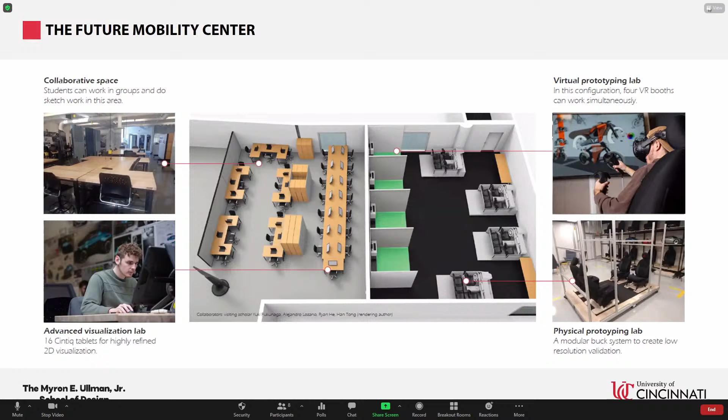From 2016 on, we had the opportunity to relaunch our transportation program and rethink how vehicle design was going to happen in this new world, with all these new megatrends converging at the same time, and this upcoming revolution of mobility and urban spaces. We created the space you're looking at here, where we can do multidisciplinary work and fantastic collaboration with our advanced visualization lab. You can see Enrico here, back from when we were doing the studio.

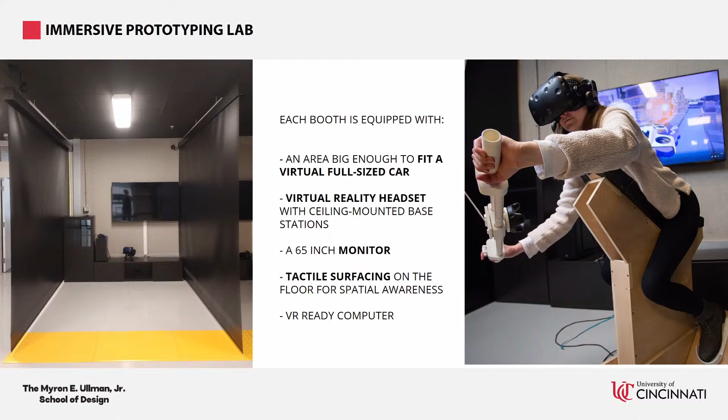On the right, you can see when we adopted emerging technologies such as virtual reality, with which Gravity Sketch has been a fantastic partner in helping us develop that. You can see Tanner here developing his capstone project. It's an interesting space that we think is a vision of the future design spaces. As head of transportation design, it's been a pleasure working with these guys connected into building this vision.

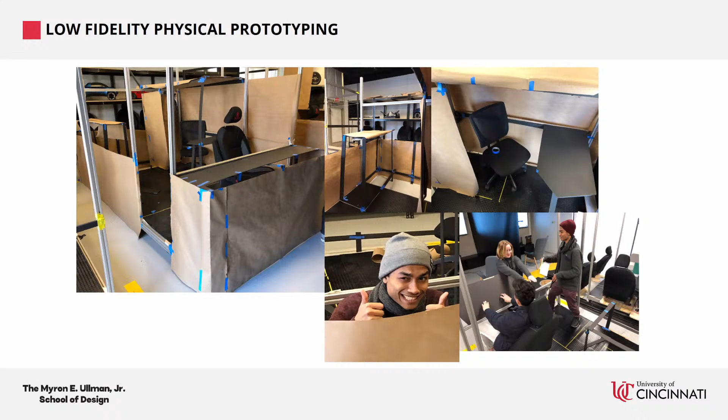It's an interesting thing where we can mix physical prototyping, quick physical validation of stuff, with the virtual reality work, so we can validate what we create quickly. This is even kind of refined — we go back, we mock it up, we go back to virtual reality, we go back, and then we create more faithful models in the space, and then we create design.

But talking about the project, it was an interesting challenge that Hankook Tire and Technology gave us about redefining the cities of the future and the vehicles that would exist there. They had an interesting approach: today we live in a world where we move from A to B in a mobile entity, which can be a car or a bike or stuff like that. What they wanted us to explore was a way to actually shift the space of point A and take it to point B, or vice versa.

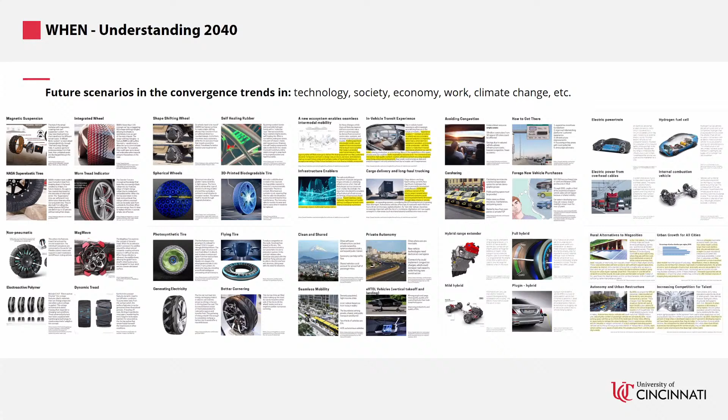They're going to host the Olympics in 2028, which hopefully people can attend by then. It's a mega city with an ocean front, and it's going to be hit by climate change since it's next to the ocean and so on.

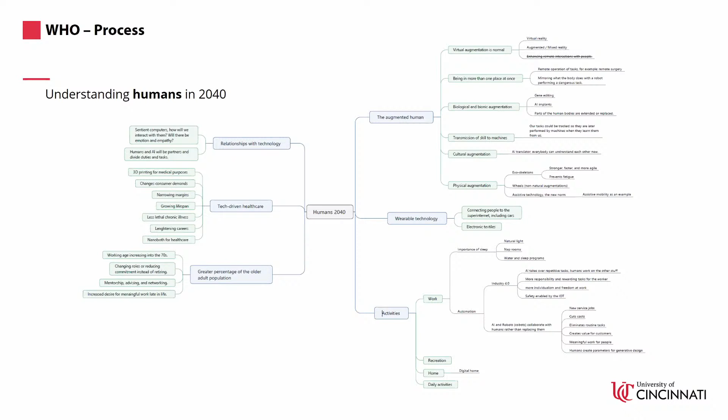So it was a very interesting concept—also imagining how people would use these vehicles, and then creating these people that would live in this context of Los Angeles in the future, trying to envision their usage scenarios and the needs in this area to find where these designs that students would create would fit, understanding their user experience and finding the best.

And what you're going to see from the University of Cincinnati students and alumni that are on the call is the results of this effort of trying to create a vehicle for this future.

And the other interesting thing is that part of the deal with Hankook was that they were going to pick a couple of projects to create a video of the vision of these future cities. Which I don't know, Jaren, if you wanted to play now, or we play at the end?

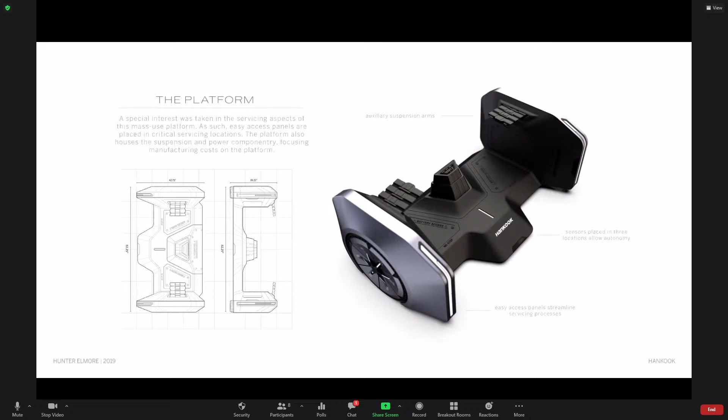Having streamlined servicing means making everything modular, so if a part does break, you don't have to have the platform off the road or out of the ecosystem of the product for very long. Easy accessibility, servicing panels, and sensor locations are all deliberately placed to make sure the entire platform can be serviced quickly and efficiently, meaning more uptime, less downtime, and faster servicing.

With the platform system, I also focused on the suspension components and how you can place different size pods and experiences on the same platform. I went with a 3-point suspension-based system with a larger suspension pillar in the middle to take most of the brunt of the weight of the pod, and two variable connection points on the sides to control body roll and other componentry, as well as electronic connections, since all the technology is maintained in the platform rather than the pod, to make the system more affordable and feasible from a business standpoint.

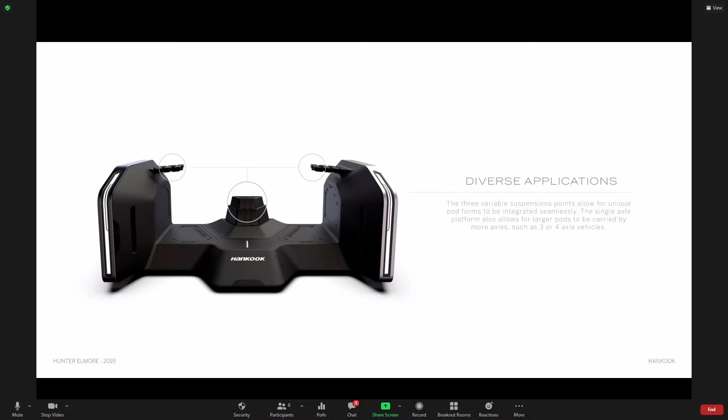Taking into account the idea of making this as diverse as possible, that central main suspension pillar can adjust to create directionality, since the entire platform is symmetrical front to rear when you combine two of them together. So it can expand when space is not precious and contract when space is precious, creating easy silhouettes so a passerby on the street can identify what direction the whole thing is headed.

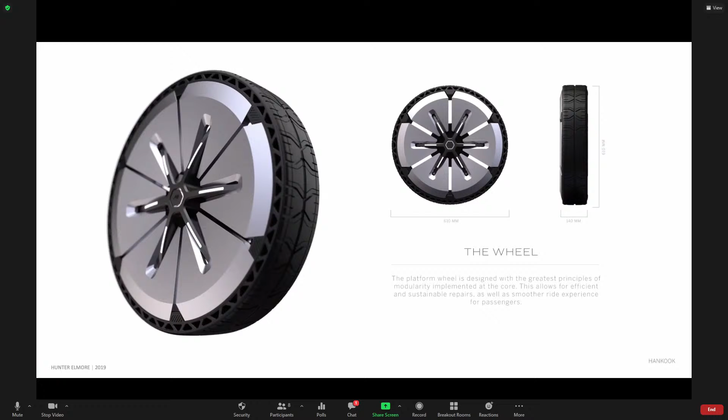Then there's the wheel—Hankook is all about wheels and tires—and the wheel for the platform was designed with that same idea of modularity. Utilizing new things with non-pneumatic tires, the fact that you don't need an airtight seal all the way around the tire means we can look at wheels differently in how they function. You don't need a full one-piece rim since there's no airtight seal required, so we used a single simple piece that could be easily manufactured at low cost for this fleet-based system.

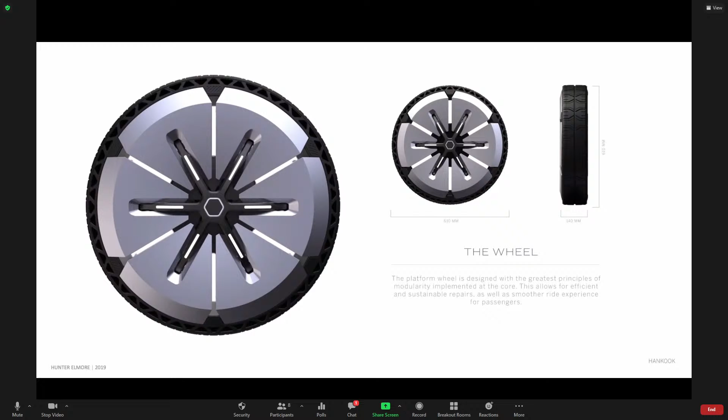Each spoke has its own independent suspension, meaning that as the wheel moves, if there's any obstruction in the road, each one can change its suspension strength to adjust to that obstacle, making a more enjoyable experience for whoever's inside the pod. It also means that if part of the wheel gets damaged, only that one-sixth segment gets damaged, so it's much cheaper to replace than a traditional wheel where you'd have to replace the entire rim for one problem.

Another big factor in servicing is that since it's in constant use, tires are going to get changed a lot. The spokes can actually contract, so you can remove the tire and slide a new one straight on—that's one of the big benefits of a non-pneumatic tire. This means servicing downtime goes from 30 minutes to an hour for traditional tire reseating, down to minutes, if not seconds. That was one of the things shown in the video, so you can see how that worked and how it's been altered since then for the final visualization.

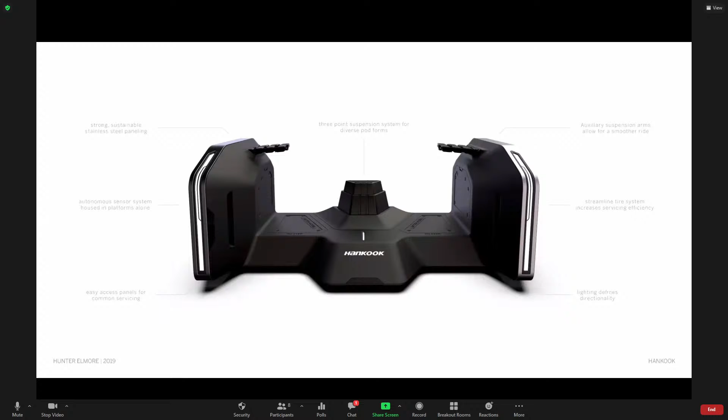That's really the platform and what it's all about—making sure everything is feasible, realistic, and very industrial, rigid, and robust.

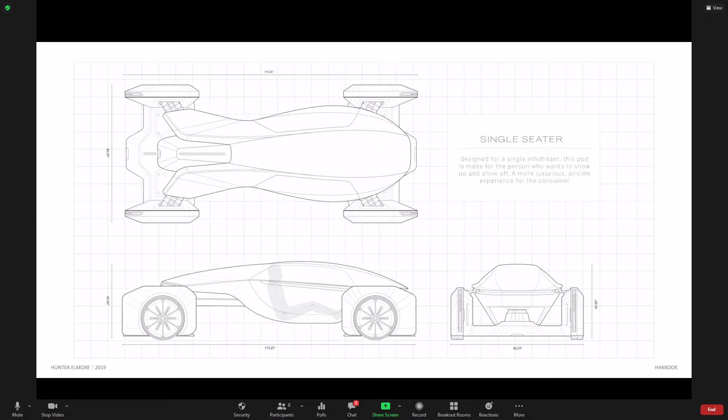But I focused on a couple of pods. The first was a small group pod, which would comprise most of the fleet in this system, made for groups of 2 to 4 people. The other is a single-seater pod, more or less for somebody just trying to get from point A to point B in style, faster and more luxurious than traditional mass transportation. Again, because the platform uses a single axle, you could mix and match however many you wanted, making big vehicles, whatever you want, since each axle is independent.

The overall CMF of the final was using polarized panels, the same idea as polarized sunglasses, letting light in so that you can see, but from the exterior it's reflecting that light, mimicking the high-grade stainless steel finish of everything else. Taking into account that this is almost an appliance aesthetic, making sure it's robust, it's sturdy, and not going to break down after constant wear and tear. Utilizing a symmetrical pod design means it streamlines manufacturing. You don't have to have as many molds or presses, because 1/4 of the car can be replaced by the other 1/4 of the vehicle.

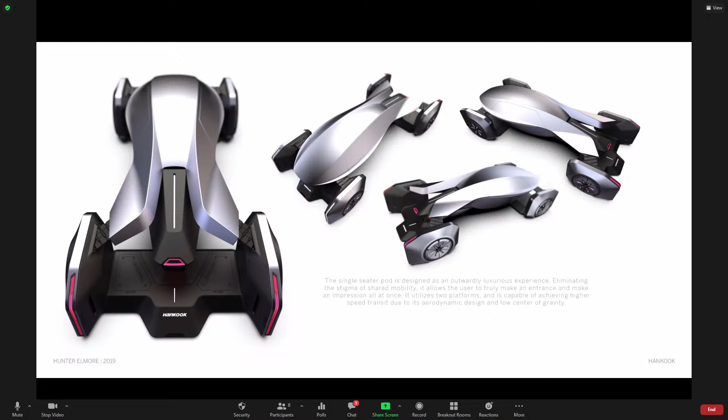As for the single-seater, it's a bit more aesthetically considered and trying to be more of an outwardly luxurious experience, eliminating a bit of that stigma of shared mobility. This one would probably be able to go faster because it's lower to the ground, has a better center of gravity, and stronger aerodynamics. It again utilizes that same CMF of the high-grade stainless steel body, holding up to constant use and abuse, and the same polarized window treatment.

But since then, I've had a lot of time, pretty much a year now, since this studio took place. I've done a lot of changing and updates, and I want to show a bit of that process. The first thing I did, maybe a month or two ago, right before the video came out, I was looking back on it thinking: how have I changed as a designer? I've had my time at Tangent, my time at Ford. How has that influenced me and taught me new processes?

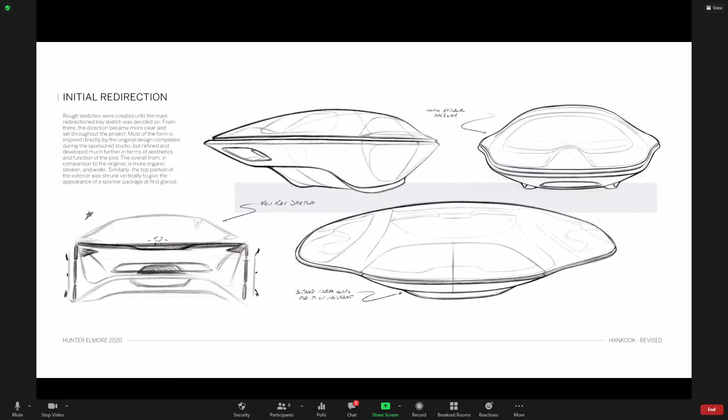So I've gone back and did some more mood boarding and changing, deciding to get away from some of that initial transparent aluminum reflective surfacing and get more into layered transparency, looking at sketches and new directioning, keeping the same overall form, process, and thoughts, but redefining some of the aesthetics, making the proportions more considered, and spending more time on it like it deserves as a project.

I did some Photoshop sketches, redefining the overall consideration of everything really quickly, and then thinking about the interior a bit more, because I hadn't done that during the semester and studio. Again, looking at how that space could be informed by the idea of a restaurant and the 2 to 4 person seating, and moving directly into Gravity Sketch.

The first time I worked on this project was back in the fall of last year, right when the subdivision beta came out, towards the end of that semester. At the beginning of that semester, I was learning Alias, and it was the first time I'd ever learned Alias.

One of the things I think Gravity Sketch is great at, and doesn't get enough credit for, is how good a tool it is to teach you theory and process behind utilizing different methods of modeling. I had never used Alias before, but utilizing Gravity Sketch and learning how to build with the curves or the stroke and then bridging between those strokes is actually really similar, and it helped the process of modeling in Alias just kind of click in my head.

And the same is true now with subdivision. I had never used subdivision before.

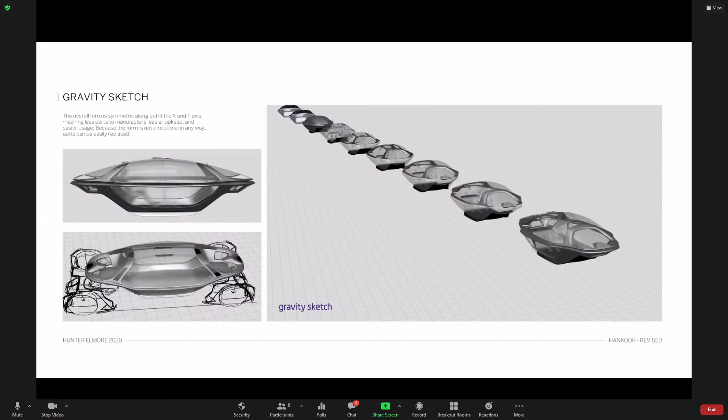By using Gravity Sketch subdivision modeling, it made the process a lot less painful to move from parametric and NURBS-based modeling into poly modeling, because Gravity Sketch is more intuitive and the entire interface is very simple, and it's more of a teaching and fun program to use. So it's a lot less intimidating to move forward with that.

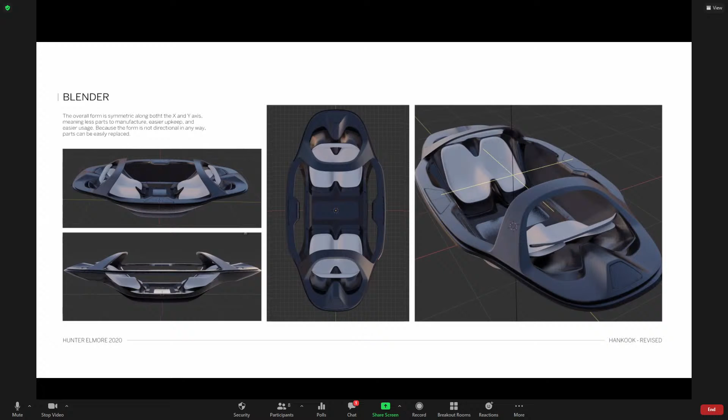So moving from that into Blender, and again, this part is kind of still in progress, but I've been redefining that pod and spending more time on the things that I didn't have a chance to during the project, and defining that interior a bit further. This part's still in progress and changing a lot, but I wanted to show a bit of what it was and what it's morphed into during the time I've been working on it since then. But yeah, that's pretty much what I have.

So thanks. Awesome. Yeah, thank you very much. It's beautiful work. Thank you.

One of the big themes throughout your project was modularity, and I've seen a lot with future projects too, it seems like the future is more modular and more efficient use of things, compartmentalizing what's being used so we're not just throwing away or getting rid of these massive piles of engineering and technology. But also want to comment on the beautiful work, the attention to detail and the aesthetic styling.

Antonio, did you have any comments as far as Hunter's work throughout the studio, the journey there?

Well, first of all, congratulations, Hunter. I think you've grown a lot since that studio happened, and it's great to see. And just a shout out to all the students watching or who will watch this: your project doesn't end the day of the critique, right? There is still room for growing and improving it, and your portfolio should represent the best that you can do, not the best that you could do then. So I think this is a great example.

I think the workflow that Hunter took led it to be one of the two concepts selected for the video that you saw. It was just an interesting story, maintaining this drama and wow factor that the Hankook people got hooked on, while still being thorough with his process and all of that.

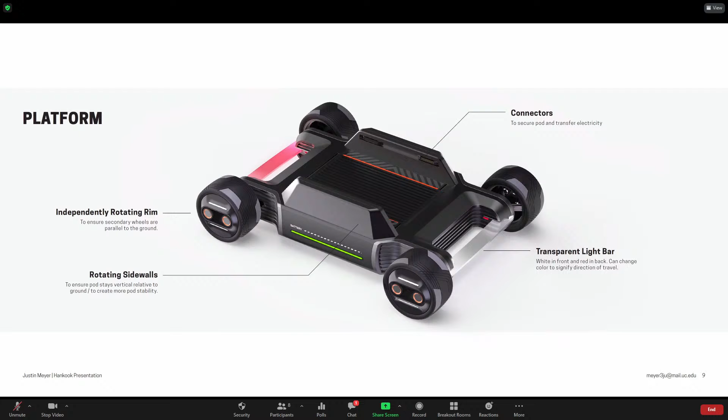The first pod that enters the fray will be the fireman pod that is able to climb the buildings quickly by making use of a central pivot that keeps the pod level with the ground. This allows the platform to simply drive up the building without having to worry about switching the orientation of the pod. Once the firemen get to the fire, the main door is able to pop out and slide up above the warning lights to allow for easy ingress and egress.

The glass of this door is made out of ceramic glass to provide heat resistance to the inferno while also enabling passengers to see out of the pod.

So after the firemen enter the apartment, rescue pods will climb the building so firemen can usher occupants into the pods for quick evacuation. As you can see, these pods are much larger than the fireman pods since they focus mainly on occupant capacity rather than pure speed.

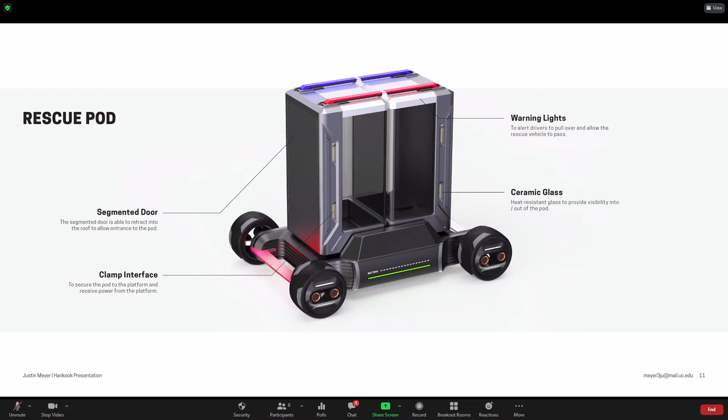This pod shares the warning lights, ceramic glass, and clamp interface of the fireman pod, but also features a segmented door at the front for ingress and egress. This door is able to retract into the roof of the pod like a garage door to create a big enough opening to enter the pod without eating up too much interior room. It is also padded on the back side of those segments for cushioning in case people are jostled in the pod.

So overall, the vehicle is about the height and width of a Ford F-350. However, the length of the vehicle is significantly shorter, about the length of a Fiat 500, to more comfortably house the gyroscopic pod.

Okay, so how does it actually work? The vehicle will first approach the rails like a normal car. However, the secondary wheels may not be aligned with the rails. I'll show these here.

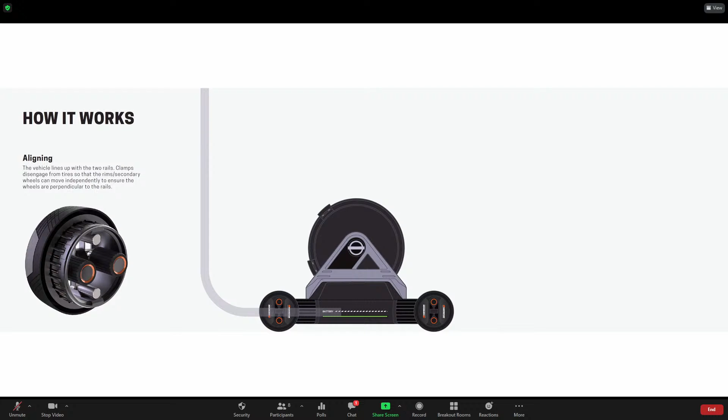So these secondary wheels, because of this, clamps between the tire and the rim will disengage, using the main drivetrain to rotate the inner rim without actually moving the vehicle. From here, the secondary wheels will be in the correct position to actually grab the rail.

So these secondary wheels will extend until the third stabilizer wheel makes contact with the I-beam. Subsequently, hydraulics will move the wheels together to ensure a firm grasp of the rail.

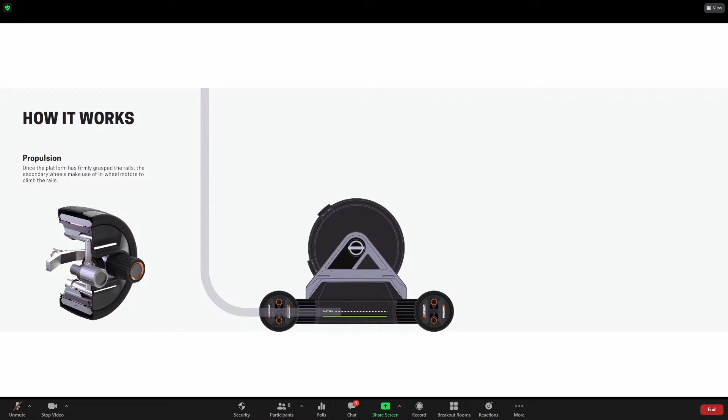Once the platform has firmly grasped the rails, the secondary wheels make use of in-wheel motors to climb them. And then because the rims are attached to the main drivetrain, they're able to rotate as the platform goes around corners and starts to navigate up the side of the building.

So as the vehicle is transitioning from horizontal to vertical orientation, the gyro pod will rotate in the opposite direction to keep the firefighters upright.

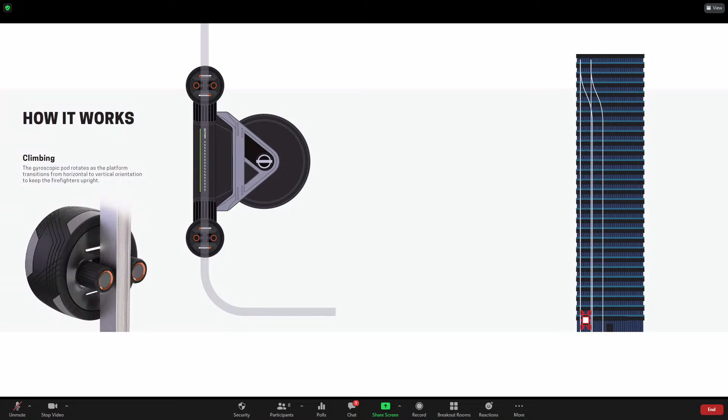And then at height, a door opens on the bottom of the platform to allow the gyropod's door to slide upwards and allow the firemen to enter the building.

So after the pod has deposited the firemen, the vehicle switches onto an adjacent rail to allow for cyclic movement of the pods, increasing the efficiency of evacuation. This way, more pods can start climbing the building before the first one has even reached the ground.

And then while descending, the sidewalls rotate to keep the pod vertical, again, to make sure that the occupants aren't being jostled around.

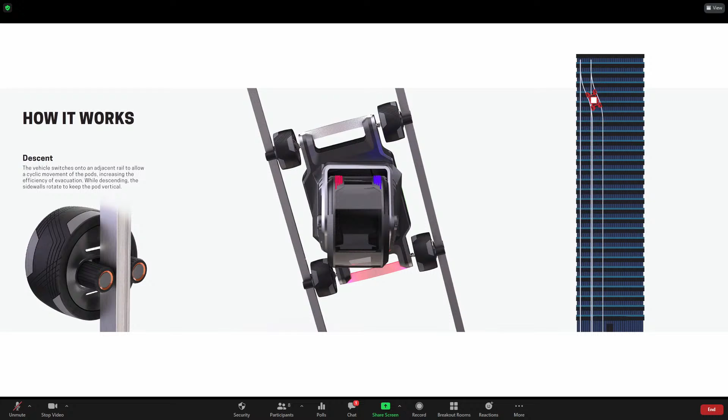So again, since the rescue pods are mainly focused on capacity, they're a bit larger than the gyroscopic pod. The vehicle with 2 rescue pods is about the width of a Ford F-350 and the height of a Ford Transit cargo van, to house 8 passengers total with 4 passengers per pod.

So since they share the same platform, the rescue pods align with the rail and mount the same way. But since these pods are too big to be gyroscopic, an empty platform will need to climb the rails first before the rescue pod can ascend the building.

So the clamps holding the pods will slide forward towards the wheel, allowing the empty platform to grab a pod while keeping it vertical.

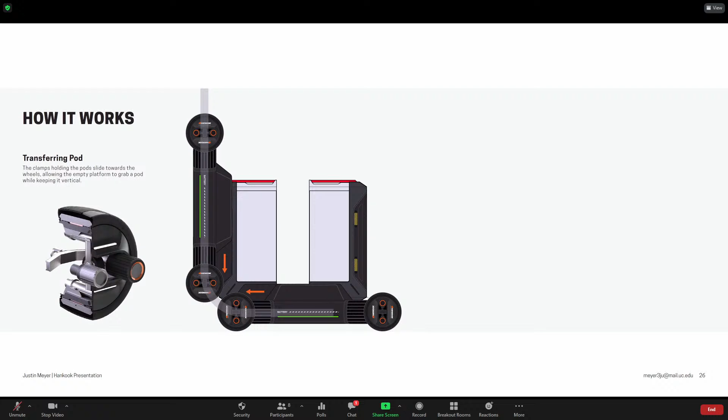So once the platform has firmly grasped the empty pod, the secondary wheels rotate in opposite directions to climb the rail.

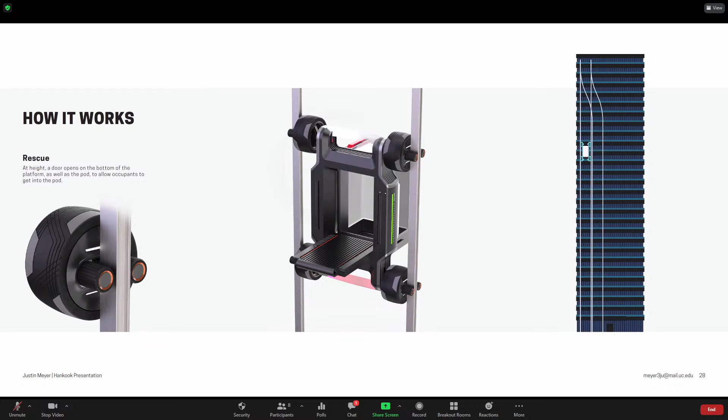At height, a door opens on the bottom of the platform as well as the pod to allow occupants to get into the pod. So since the firemen will already be inside the building, they will be helping get any injured residents into the pod and assessing whether the vehicle should take them to a hospital.

And then again, as the platform descends, it will switch tracks at the top of the building to prevent vehicles from crashing into each other and allow for a queue of pods to aid in efficient evacuation. So like the gyropod, the clamps will rotate to ensure occupants stay completely vertical.

And then in the aftermath, if occupants are injured, the platform may not transfer the pod to another platform. Instead, wounded occupants will lean against the padded door and are transported to the hospital laying down, to save time in the transfer process and to keep the occupant more comfortable.

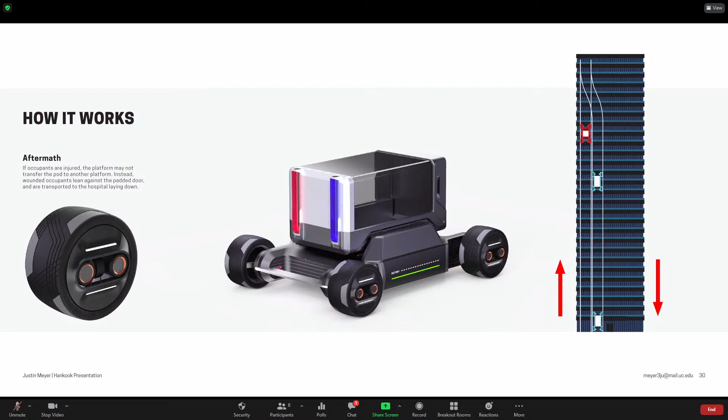So hopefully in a worst case situation where the fire has really gotten out of control, this system would be able to expedite the rescue and evacuation of any trapped residents by allowing firemen to climb to the top floors with full stamina, by providing rapid transportation to the ground. So thank you for having me, and that concludes my presentation.

Awesome, thank you so much. Again, great work. Yeah, it's obviously very technical, and I love how much you thought through every detail of the vehicle and how it would transition and transfer, the packaging. It was very well thought out. Excellent.

It's almost like this might be an oversimplification, but it's like an external elevator basically, but also a vehicle. Yep, that was like the whole concept. Basically just an autonomous vehicle that wouldn't rely on any infrastructure or main infrastructure on the building to be able to get up it, other than the rails. But the rails should be pretty sturdy, theoretically.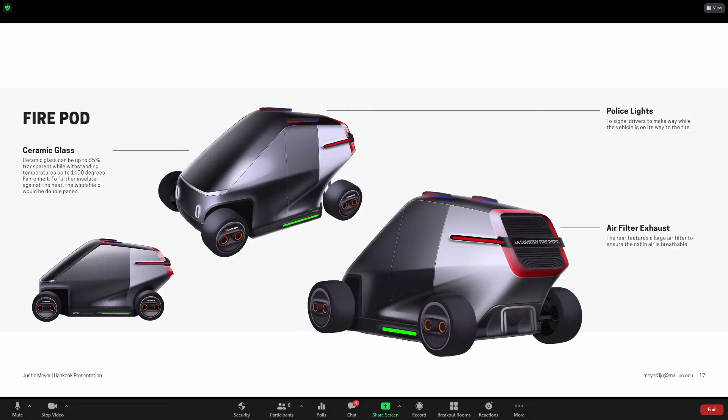So, oh yeah, go ahead. I was just gonna say, from here this kind of ended up transforming into my final direction, by basically cutting this thing in half and using half the amount of rails.

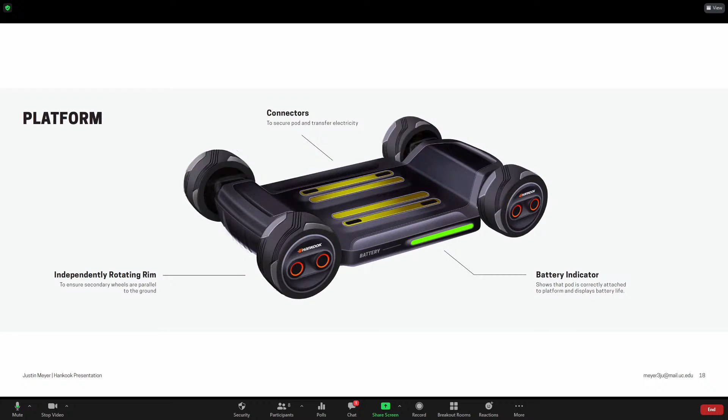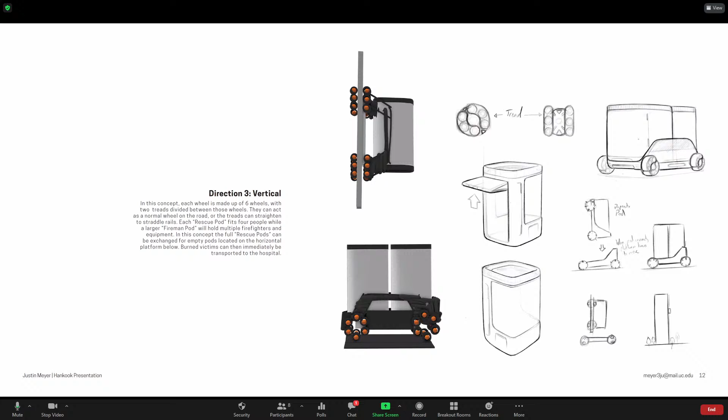Yeah, because I could see some of your earlier sketches there. It's cool seeing some of your early ideas of multiple cylinders, multiple small secondary tires as you call them, and seeing it evolve into that more refined concept that you have there. It's really neat. Thanks. Yeah, I just took a little bit of each of these ideas and was able to amalgamate them for that final concept.

It kind of reminds me, I don't know if you've ever seen the movie Minority Report. Have you seen that movie at all? I have not, I've heard about it though. What is it about? There's one very cool scene in that movie where Tom Cruise is riding. All the vehicles in this, and it's in the future, ride along on highways, but then they also slide up vertically along into their apartment buildings. So his vehicle comes up vertically right up against his apartment building, and he just walks into his apartment from his vehicle. It kind of reminded me of that, and there's this whole action scene he's in, but that's just so cool. I love the concept, and it's super creative.

Antonio said at the beginning of the project, we were thinking precisely about how the explosive growth of mega cities of tomorrow would probably grow faster than being properly planned, so there would need to be new solutions. Talking about that, you mentioned the external elevator kind of came up to deliver stuff, and that idea of maybe we don't have to be on the ground got applied to some of the other projects as well. Justin was always really interested in the rescue aspect of this, and how these new cities could be shaped to be able to rescue somebody on the 120th floor. We've all seen that movie with The Rock.

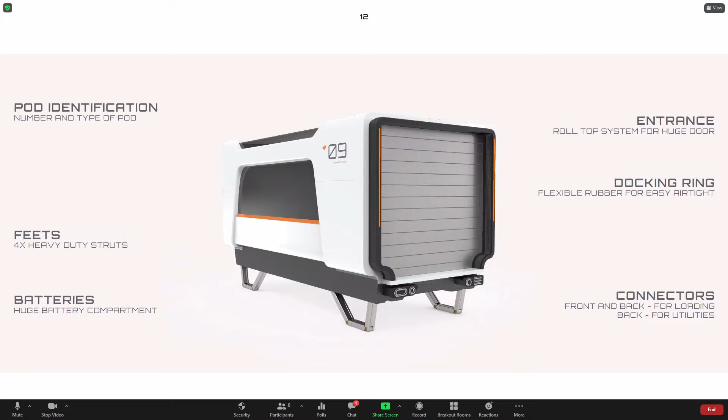I was trying to come up with a pretty technical, feasible solution, and split it up into 3 parts, and all is connected with the Swarm AI. Starting with the home pods, you have those modular living spaces which can dock onto the house or whatever, just basic dimensions, and then the system is on a rail basis. So you have those hydraulic feet, and then when the platform arrives, it just goes up and the platforms can slide under, right? So you have a really variable system that can handle a lot of different pod spaces.

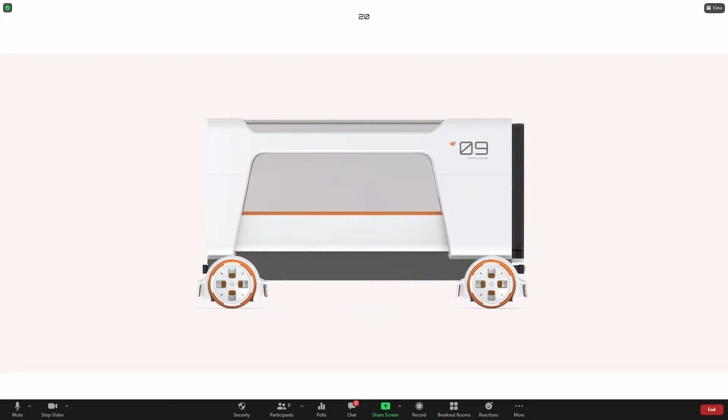So the axle, I was trying to do something really compact, as I said, and that's where Gravity Sketch came into place. I was really used to developing small hand devices, really product oriented, and Gravity Sketch was a great tool for me to get into freeform shapes and a different scale of product. You can see it in real size, and it was really helpful to understand the material.

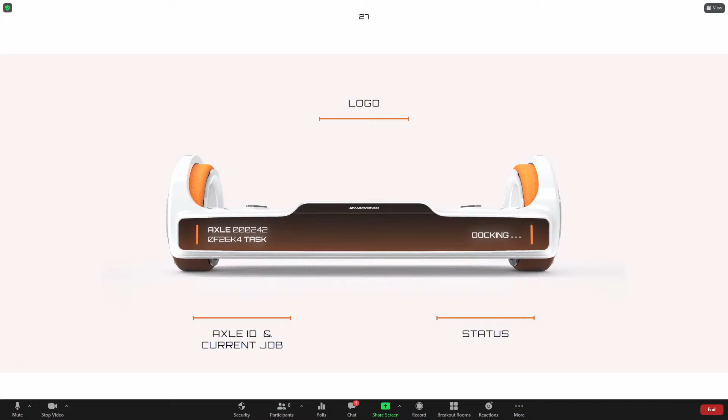So this is what I came up with. As you can see, you don't have steering space because I was approaching an Omni wheel, which I will come to later. And yeah, you have a combination of really technical, basic shapes, but also some freeform surfaces. As you can see, you have a big screen in back and front. It's a symmetrical design, and the display is for communicating with users and also with the public for signs and stuff.

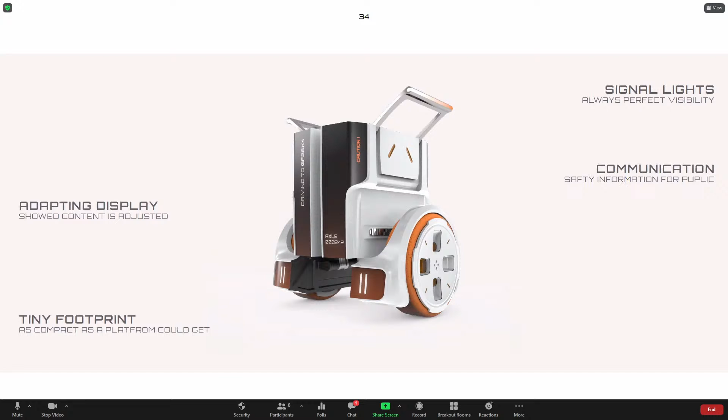And yeah, it also folds, right? So the idea is to have those little servants that are driving around, don't use that much space, and are also safe. So you also have the little ears there with the LED lights. And as you can see, also heavy duty hinges, because I wanted it to feel really rugged and sturdy.

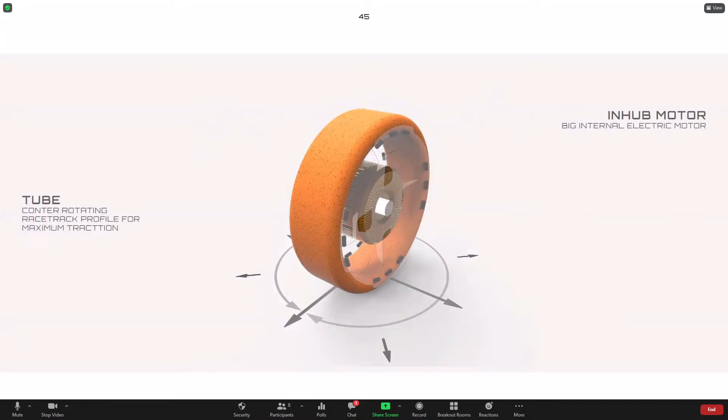And yeah, so this is basically what it looks like inside. You don't need that much space of battery inside there because the system is about having the main battery in the pod. So the Omni wheel is a wheel that can move in any direction because you have a tube that goes around. So you have the main motor inside and then other motors that are driving the tube inside. So you can combine those two directions to move the whole pod in really compact space. And you have those roller connections inside.

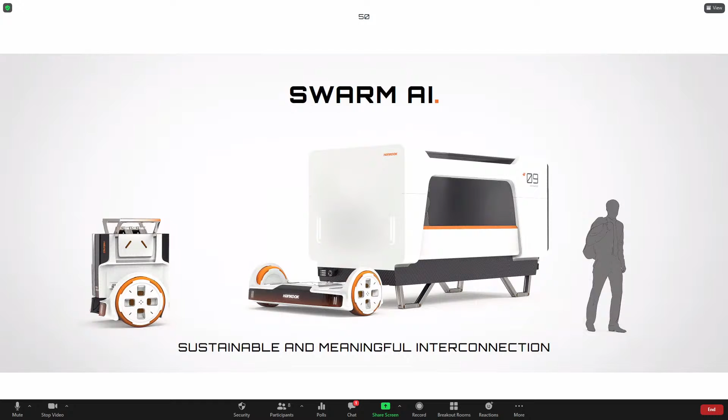And yeah, basically this is the whole system. I also thought about the approaching of energy. So the main battery should be in the pod, so it's easily loadable just from your home, and the axles themselves are getting loaded from the pod while driving. So the pods and the axles can be used consistently. So it's also a sustainable way of changing and sharing energy.

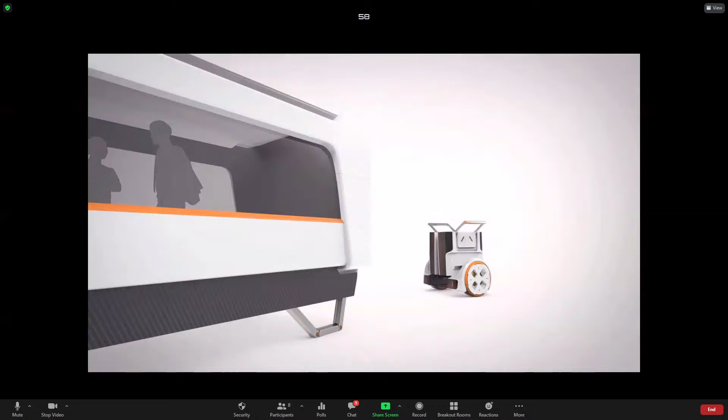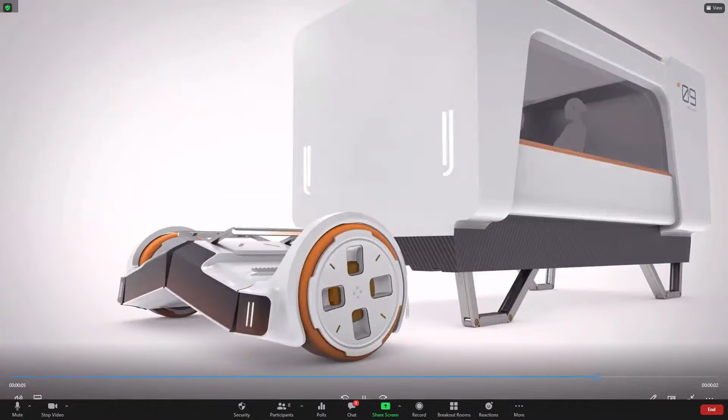And here's some visualizations. And yeah, then I have a little animation just to visualize how it works. Okay, let's see if that worked. You tell me if you see something. Yeah, it looks great. Okay, all right, and that's pretty much it.

Wow. Yeah, beautiful work. Yeah, all of these are just so excellent.

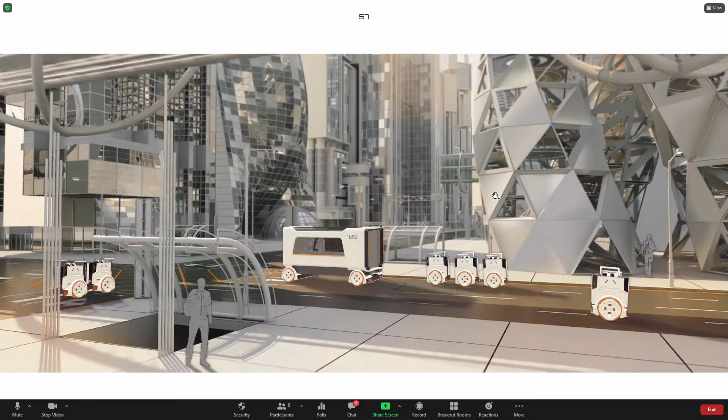The Omni wheel is very interesting especially with the little rollers, because I was wondering how it folds and unfolds, and then when you explained that it was a tube, it made sense. There are little rollers inside, so you can easily compress the axle by using the tubes. And this concept of mobile wheels and having an axle, this independent axle system is super powerful. I can see how there could be an endless amount of applications for something like that, and all kinds of sizes.

And I think it was kind of shown earlier by Hunter as well, as you could have an endless sort of package size for modular wheel mechanisms like this.

This one came. Go ahead. I was going to say, I'm reading some of the comments, and people are just saying awesome, and there's fire emojis and things like that. So yes, people are loving it. But go ahead, Antonio, what were you going to say?

Well, I was going to say the concept that Enrico showed also came from kind of when we're thinking about the future city, right? Similarly to Justin's project about the rescue and how to get to those heights, this one was about houses or apartments becoming modular in a way, where portions of your house are always there, but potentially portions of your house could travel everywhere. Or if it was your movable room that got plugged into a hotel, which was part of some other project.

So finding how to move these larger spaces was a very interesting thing. It was also one of the interests from Hankook about how to actually move spaces that are not supposed to be mobile spaces, and now making them mobile spaces. So Enrico's project was really good, and again, kudos to Jorge as well for his support with this technical thing. Although also Enrico, being from Wuppertal, they're very strong about their technical sides as well, so he had a lot of that sorted out anyways.

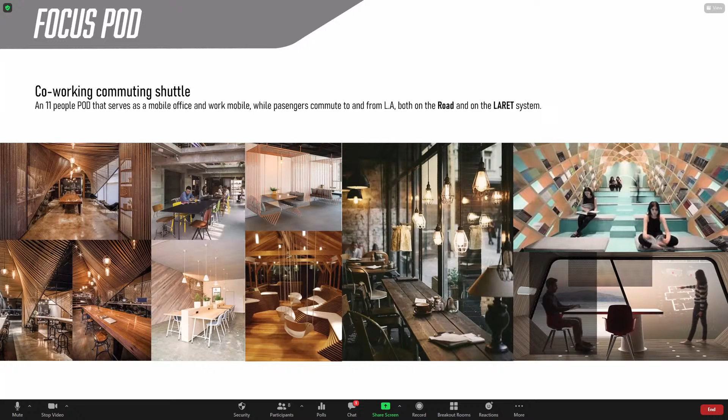Initially, I was thinking of 11 people, so this was the atmosphere I wanted to create for the case scenario, but potentially many more. Thinking of multiple kinds of users, in this case, a marketing consultant who has to commute to LA back and forth, giving her the chance to really do this and be productive. But essentially, the main premise, as you'll see in this project, the focus was on the function and the system.

Like I mentioned before, I was working on a much bigger thesis for my master's in design at UC, so I was really trying to think of infrastructure, mobility systems, and this was my chance to do it because I had done some more traditional automotive styling projects before. But in this case, the idea of a vehicle that autonomously goes on the road, then joins a ramp or platform in which it articulates its skateboard and then joins a mass transit system, essentially coexisting both.

In my process, again, Gravity Sketch was super helpful. And like you'll see in a couple of different places, I find myself using Gravity Sketch for some unconventional reasons too. So I used it, of course, in the exterior exploration to find the right volume, find the right platform from which I could sketch and go back and forth. Or if you look at the interior exploration, just finding the right configuration. Again, I was thinking of a focus pod, a commuting coffee house vehicle, and finding the right balance between occupancy and productivity, and the atmosphere was key.

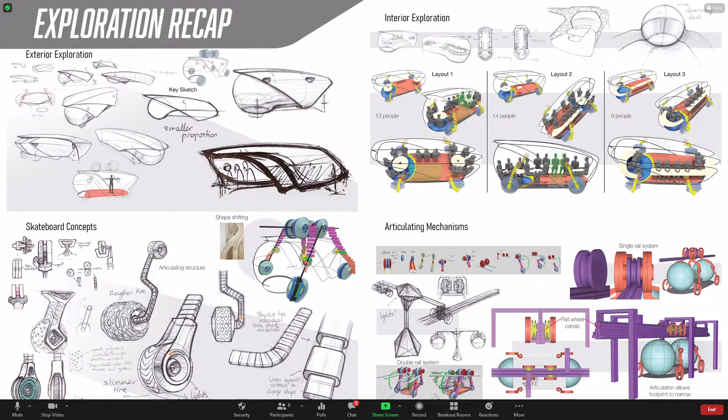But where Gravity Sketch really helped me was to try to figure out how to go from the road to a rail system. That was a huge complexity that, thanks to Jorge especially, his expertise was really helpful. In Gravity Sketch, I was really trying to envision different ways in which you could have a skateboard that allowed a vehicle to go from the road to a rail. One example I was able to pull back from my process is this one, in which I was trying to build a quick mock-up of a ramp.

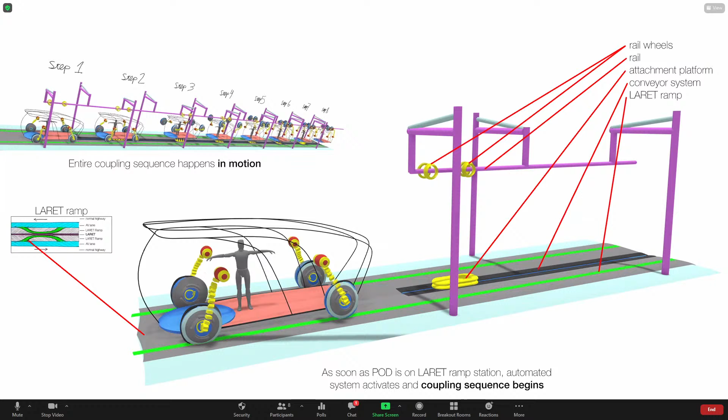Again, very loose and sketchy, but at the same time trying to figure out how to do this. So basically doing a Gravity Sketch storyboard, essentially, in which step 1 is the vehicle is on the road, and then it joins the system.

The idea at this point was having two rails, one on the bottom, one on the top. And as soon as the vehicle begins the coupling process, which is autonomous, there's this ramp that elevates it to height, and then it starts articulating the skateboard where the wheels are. And there are these two discs that are autonomously also moving at the same time.

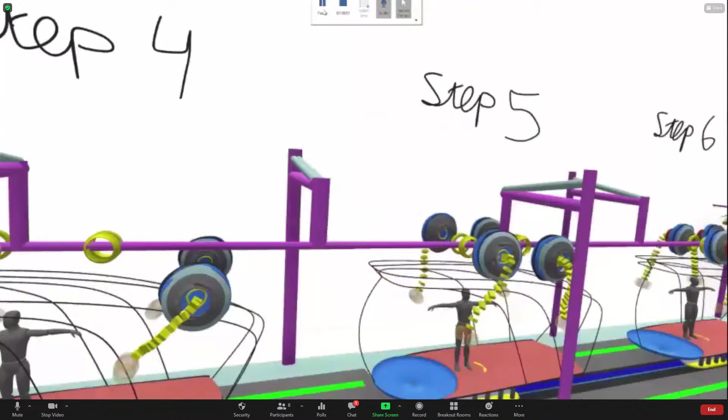And there's a point in which they couple through maglev technology. So magnetically they attach, and at that point it joins the rail system. And then that was the idea of, okay, eventually it ends up back in the rail system.

Another quick example was just thinking through the environment on the inside. I didn't focus too much on the aesthetics at this point, but it was just really finding the right balance between productivity and that atmosphere of a co-working space. So envisioning a co-working space, but in a vehicle.

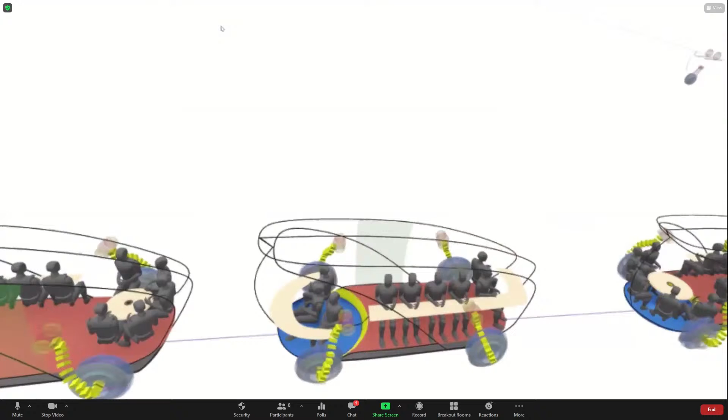Moving on from here, at the midterm level, I had a pretty good idea of what this needed to be. Again, there were some gaps yet to be explored, but it was this idea of the articulating skateboard that really allowed that transition to happen.

Later in the process, I was able to spend a little bit more time refining Gravity Sketch. Again, the aesthetics weren't the main focus at this point; I was really trying to figure out the transition aspect.

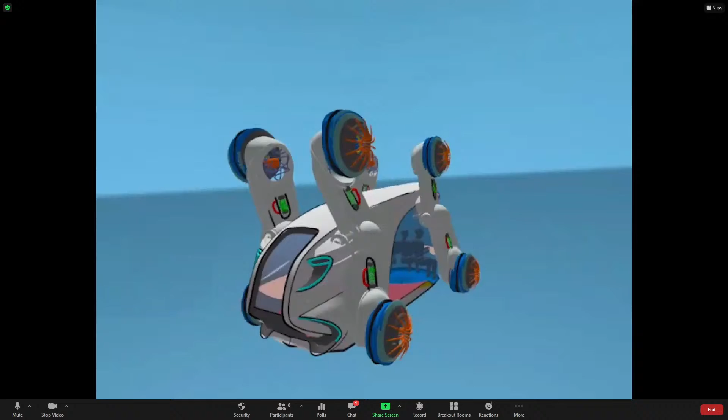I was looking into generative design, some of the sources of inspiration, so creating these structures that really allow and support a vehicle that can do this. Jorge, again, was super helpful with this part of the process.

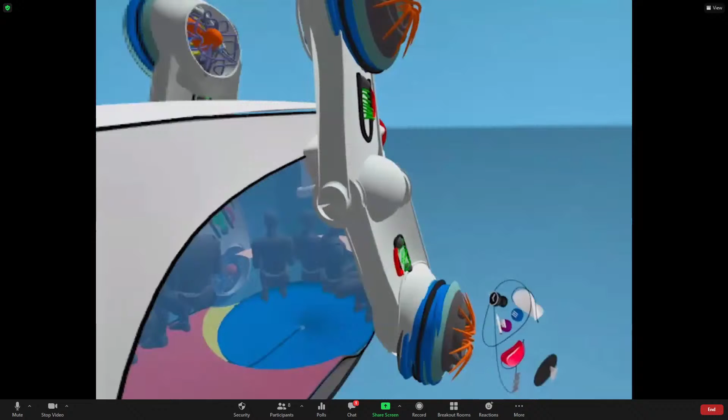And I went through multiple iterations. These are just a couple examples, but in Gravity Sketch it was really, really easy to map these things out and really go step by step in seeing that.

After the midterm point, I found an analogy in airplanes. Airplane wings are supposed to support a huge load of pressure force when the airplane is taking off, landing, or in flight. So what if the skateboard itself was an analogy for an airplane wing? That was a really crucial idea that took me to the next steps.

At that point in Gravity Sketch, I was able to translate that directly to Alias, which is the software I had used the most, and that's where I iterated most of these concepts. And that took me to the final concept.

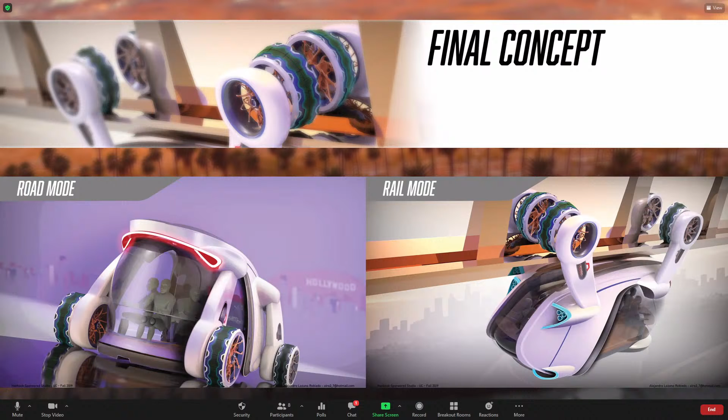From now on I'll be explaining some of the main features. Again, the main focus was on the system perspective, the articulation. That articulation happens in a gull wing style. Basically, position 1 is on the ground, position 2 is on the rail, and it articulates to the outside, but the pivot of the wheel is collapsed basically to allow that movement to happen.

And then the way it happens, like you've seen before in the diagram, is there are two rails, one at ground level, one on the top. Essentially that's the stabilizer that allows all of this movement to happen, and it uses maglev technology to stabilize the pod as it does it.

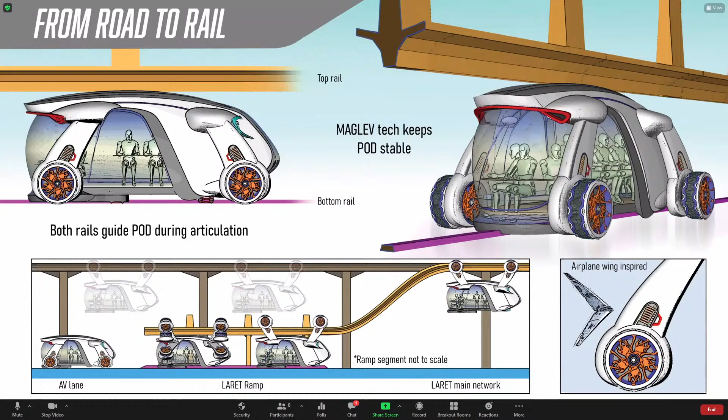And how it supports it is through this skateboard structure that is inspired by airplane wings. Again, going with the analogy of airplanes, I also included a landing gear mechanism that is hidden on the floor of the vehicle, but then it deploys when it senses that it reaches the platform. And that, again, with the top of the rail, it creates this electromagnetic field as it goes through and begins the articulation.

Something really interesting that Jorge actually suggested was that the rail itself was not perpendicular to the ground, but rather on an angle towards the inside. This allows the vehicle to be much more stable, and it reduces the friction.

With that in mind, I also designed a wheel that can go from a cylindrical shape to a conical shape. This deformation of the wheel also permits a much more stable ride, because safety would be a huge concern here. The way it does that is the wheel of the outer rim has a structure that expands while the one on the inside remains. And then it has micro polymers that are magnetic, and it senses the contact surface area, so as the vehicle moves, it allows this stabilization to happen.

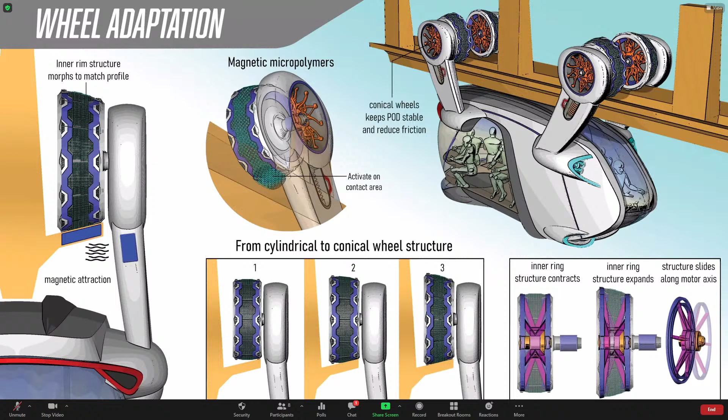Again, since this was a project for Hankook Tires, the skateboard component and the pod component were really important. So how does it do it? The functionality was a huge priority.

I was looking a lot into generative design, and I went through multiple studies using generative design in Fusion, then mixing a couple other software to find the right balance. This was essentially what ended up coming after all of those studies.

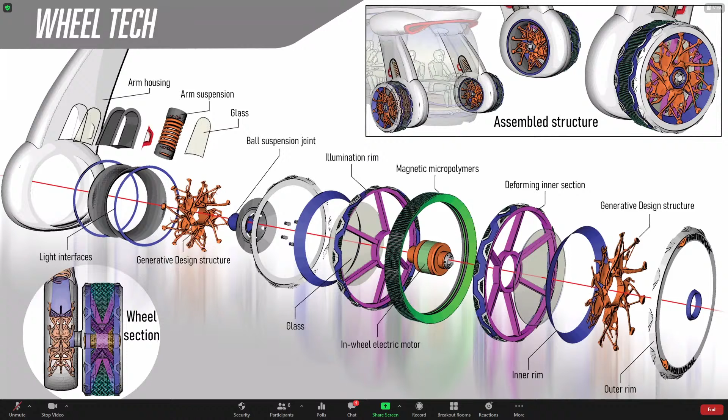It was really about offering this new experience of a concept vehicle that you can work in as you go, but then it offers the modularity of the road and the rail.

Another component of the project was really thinking through more functionality. So the one I proposed for this project was the focus pod, but potentially you could have all kinds of pods, both for cargo or more traditional transportation, or many other kinds of vehicles from which the skateboard applied.

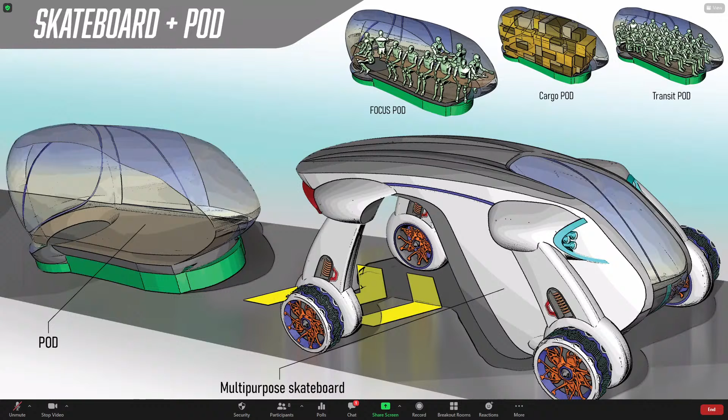Then you would have these stations, basically, in which autonomously the vehicles would drop them and pick some others up. It would be on demand, since we're talking about 2040, we're talking about hyper connectivity, so everything communicates with each other. Essentially, that was the final idea for the concept.

Also thinking through how lighting can communicate different features. So maybe when it's on the road, it communicates through lighting what it's doing. And then when it joins the rail system, it also changes its language.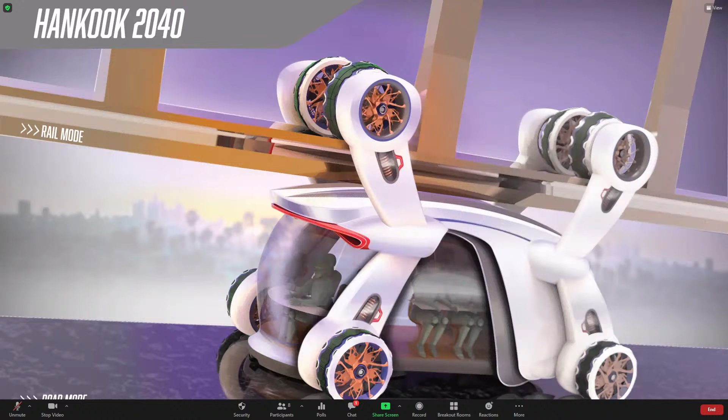Like I've been mentioning before, for me, the use of Gravity Sketch has been a little bit more on the system side. And since I was working on my master's thesis project, what I was able to prototype here fed a lot into the final project I presented.

So that's where my version 2.0 continued, I guess, in some way. But essentially, that was the project.

It was really fun. It was really interesting just thinking through the complexities of the future of mobility systems. How can we integrate a vehicle that goes on the road and then joins a rail system, I guess, was the main premise. And from a conceptual level, that's where I kept it.

But there's definitely lots more to explore yet now that the concept is there. So yeah, thank you, everyone, and happy to answer any questions.

Well, beautiful work, Alejandro. Really cool concept.

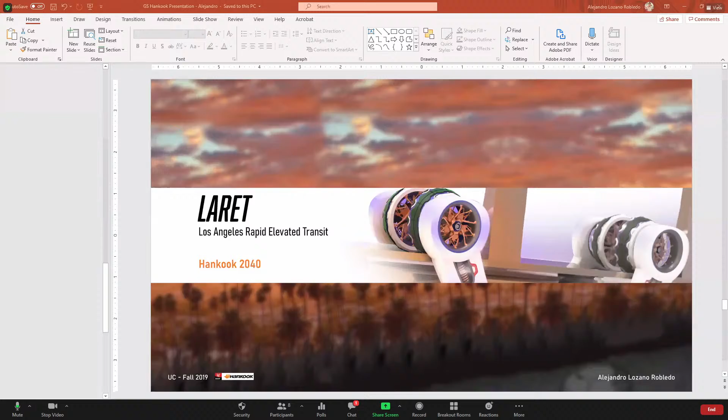It was really cool. One thing I'll just say, one of the first things I remember is just like, I love seeing your explorations in Gravity Sketch and how you were trying to find these different functions and systems. It was really interesting, different exploration in Gravity Sketch than we usually see.

It's usually aesthetic exploration and all these different stylings, but it's just another example of how you can use VR to explore, not only how things look, but how things can literally function in a system, in a network.

And what a really cool idea. It's just like a vehicle that is on the ground and then transitions into this rail system, and it's very grounded. We're all familiar with rail systems. It's a very proven form of transportation as well. It's super, super efficient, super fast.

And it's almost like you're bringing the best of everything in public transportation and transportation together in this project. And it's just really, really unique.

And the angular wheels, I thought that was really interesting as well. I've never thought of something like that before. And you were saying you got some inspiration for that from Jorge?

That was all Jorge. Yeah, I remember you were saying, seems like a lot of people have gotten some inspiration from Jorge. I'd be interested to hear some of his thoughts on it. He's a very inspiring person. Yeah, the studio and the project.

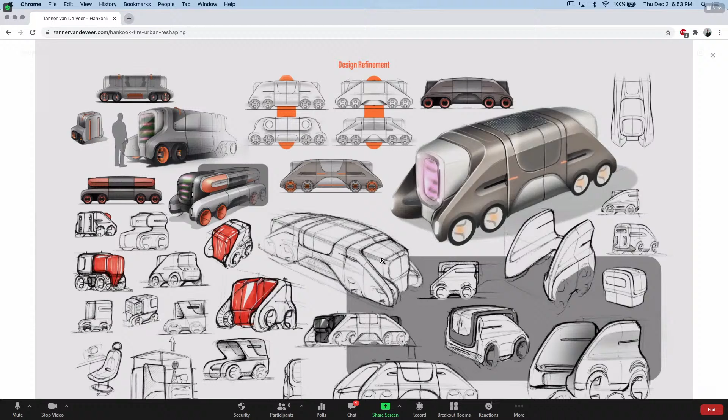From there, moving into CAD development, working from Fusion 360, Alias, and a combination of the two, and occasionally moving into Gravity Sketch to validate those things at full scale. I don't have any images of that, but that was part of my process. Then landing on more of a final concept in the bottom right.

This system, this package, is about the size of a current full-size truck. I wanted to keep it within those dimensions because it's living in an existing structure of a parking garage. You need to be able to clear the height clearances as well as get around in the tight spaces there.

This is the final wheel design. I have a little animation showing how that works. The outside rolls around kind of like a bearing, and then the whole wheel turns on that axis. So you don't need an axle and rack and pinion system running through the whole vehicle.

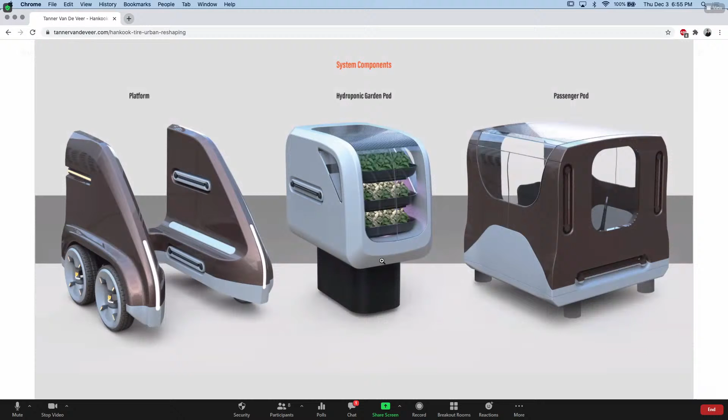In terms of the platform, there are three key parts to it. You have the platform itself, which is kind of the workhorse — it helps with harvesting, planting, growth, etc., as well as distribution. In the middle, you have the hydroponic garden pod, where the actual growing happens. And then the passenger pod is where the farmer can sit to take his farm with him.

You can kind of see here how that works — the driving pods take the plant pods and combine with the passenger pod to create this full system that can then move to the road. You can see the wheels turning there, as well as how this vehicle will open up during a market scenario.

Just some kind of final design images here. So really soft forms combined with crisp edges to make it still feel a little technical, but very friendly, inviting, and overall just accessible to more people.

Some more images here. So if we look at this scenario in terms of context, first we have the farm. So what that parking garage might look like as a farm is you just have a bunch of these pods lined up. You're growing vertically within each pod, and then you have different driving pods, robot pods moving around, picking up pods, dropping off pods, helping with planting, growth, things like that. And then they can combine to then leave the system and go onto the road.

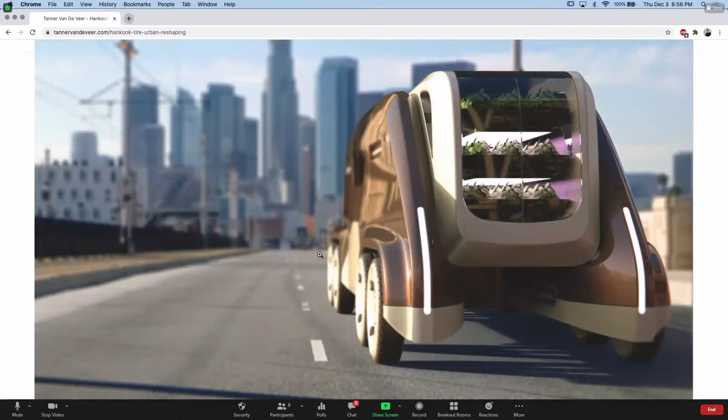So when you're on the road, driving to your destination, it's important to note this is over short distances, within neighborhoods, which gets rid of a lot of the current problems.

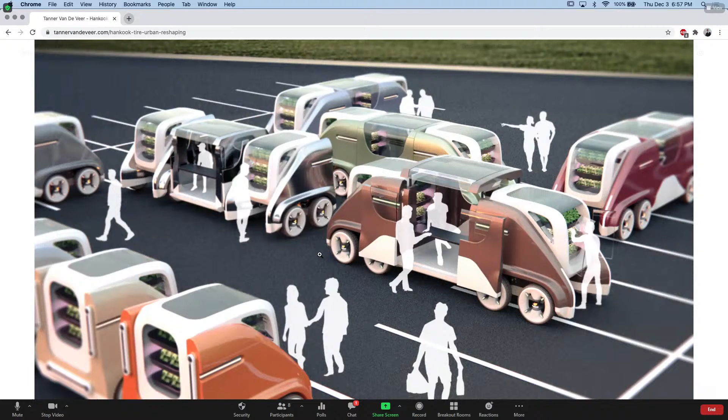And then the final part is the mobile market. So this is where a bunch of these systems can kind of meet up and hold a market where communities can come and buy fresh produce, whether that's in a local parking lot, a park, wherever that might be. It gives the farmer the flexibility of taking their farm with them and getting directly to the consumer, so you reduce the redundancy of the transportation there.

Just some final images on a ground level of what that would look like, as well as when it's closed up. And then an additional look at the wheel.

And then this obviously got into the video and was changed a little bit, but I really do like what they did with combining it with hunters in terms of the platform aspect. I think it makes a lot of sense, and it was just a great addition to the project, I think.

Awesome. Well, thank you very much, Tanner, for showing us that. It's a great project, and I love it. It's definitely a different flavor of transportation project.

You know, focusing on food and I love how you just married these things together of new ways of transportation, because it's still a very relevant and futuristic transportation project, but you also brought in just a fresh produce, fresh food element to it, and a communal experience that is unique to food and food truck kind of community. I don't know, I like it. It's very unique.

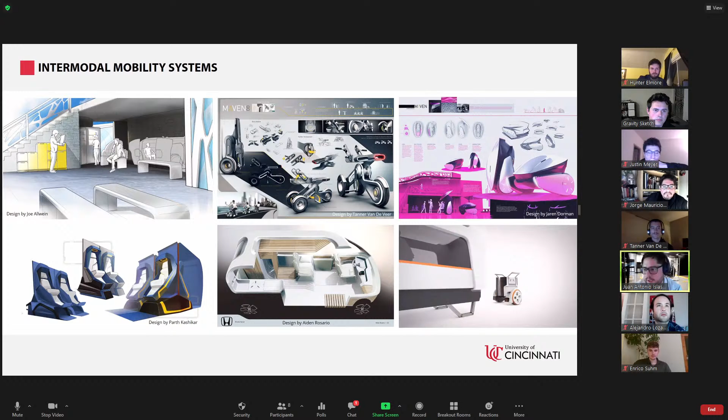We have new types of mobility like Hyperloops, right here by Parth Kashikar, and Joe Allwein on the top left who designed a mobility station as well. So the spectrum of mobility is bigger than creating just a vehicle that moves people or moves things. I think part of it was creating the vision of that city and then filling in the blanks.

Just real quick, I want to say we had a new concept of fire truck by Alan Hiller, an actual graphic designer who was in the class and created a project over there. Fang Yezhou created a mobile workspace where you can undock the platform and use it kind of like a Segway, which was fantastic. With Grace Weber, who had this Zen massage relaxation pod for a world that's feeling more and more stress.

We had police cars, Jasper Mendo. We had kind of like moving rooms with Birkin Orac, with Selim Ofles as well. Manuel Oman had a mobile hotel room. Parth Kashikar had another rescue car. Maximilian Kleist, another habitable vehicle that moved. Tanta had a food truck. Sebastian Kruger had another single person moving vehicle. So everybody kind of created different types of vehicles for different areas and created this vision.

When you put them all together, we're kind of hoping that Hankook would take all of them and create a 2-hour video, but that's probably too much to ask. But it was just so much fun to envision. Let the future context give you the mobility solutions, right?